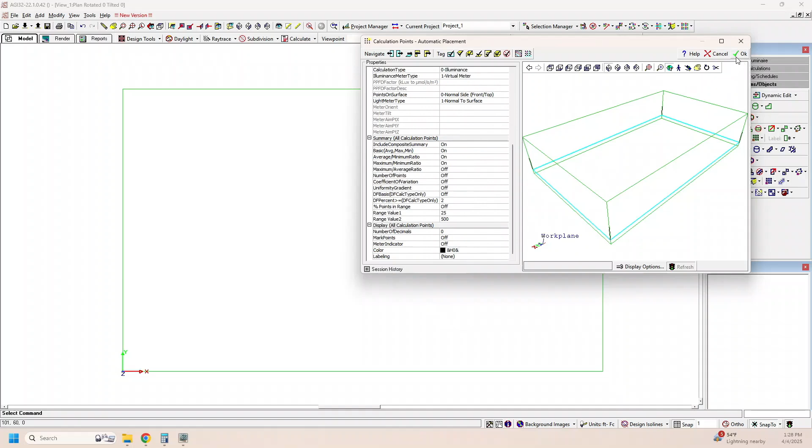So what we're going to do first is an indoor shop. Let's make it 20-foot high ceilings, 100 by 60, so a 6,000 square foot industrial shop or warehouse, something like that. It's going to be perfect for our Durabay linear spec fixtures or our Durabay F UFO high bays. So here's our 100 by 60 structure.

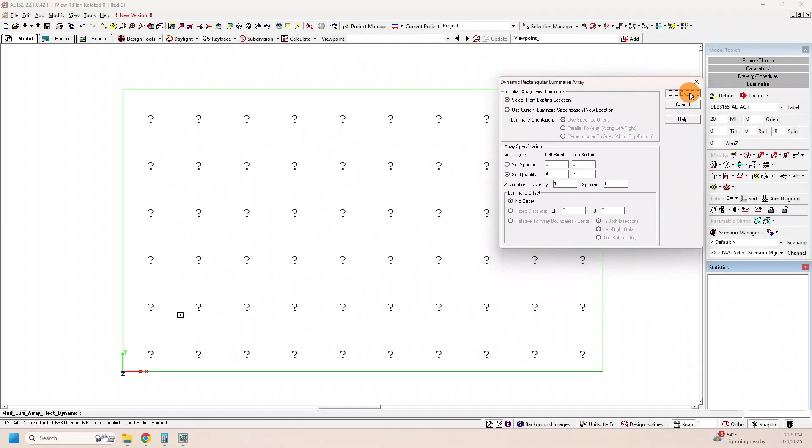First we're going to lay it out with DLBS 155s, which should be pretty good. In general, when I do these layouts, I just guess and check. I've been doing these a while, so I kind of know where to be on everything. We're going to lay out this project as a 4 by 3, equally space everything, 12 feet from each wall. I'm going to hit calculate here and see where we're at.

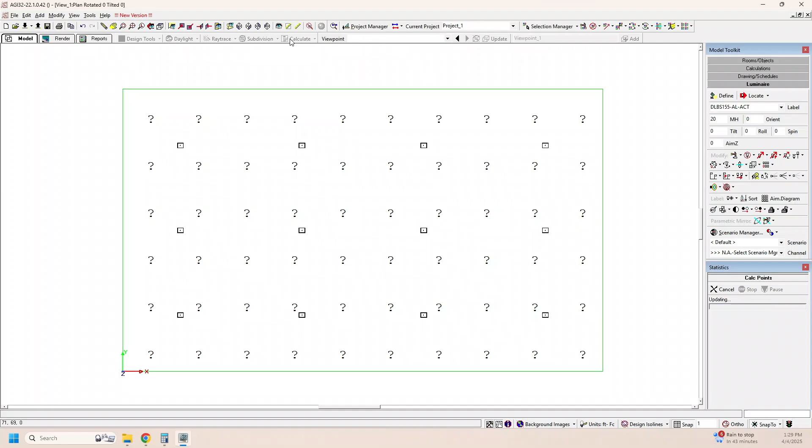Each of those question marks will turn into a foot candle reading at the floor, typically about 2.5 feet off the floor, which is kind of industry standard. When you're looking at these, I'll take a screenshot and put it in a PDF report. These are all foot candle readings, spaced 10 feet apart. I usually just try to make something that reads well. Each of these fixtures is mounted at 20 feet.

And we're looking over here at the data. Your average foot candle here is 48.2. That's pretty good for any sort of mechanic shop, workshop, or warehouse, anything like that. We're in good shape.

I do not love these two numbers, the average min ratio and the max min ratio. Those tell me the consistency of the light. I like average mins to be in the low ones, 1.2, 1.3. Max mins I try to get under 2, and that basically shows how consistent the highs are from the lows, and the averages from the lows.

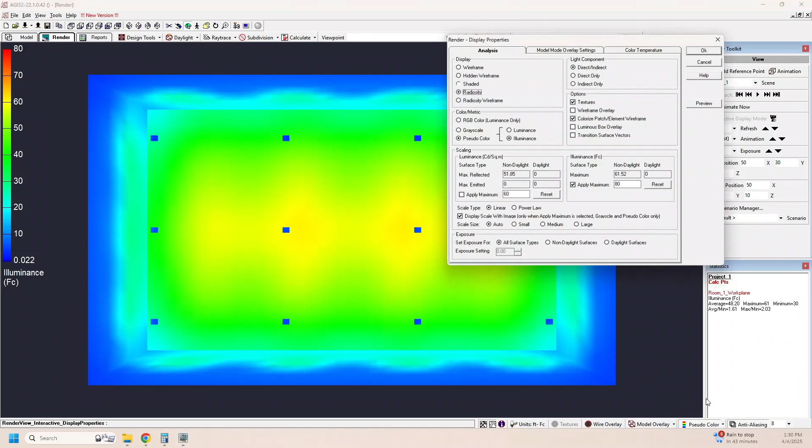I can look at this other mode and run this pseudo color, and what that essentially does is reference each area of the floor on this chart, so we can see it a bit more dynamically. Instead of comparing numbers, we can compare it to this rainbow over here. The reds are brighter than the greens, and as you can see it's kind of light blue up here where it's pretty dim. The orange and red is concentrated in the middle, so it's really bright there, and a little dim on the outside.

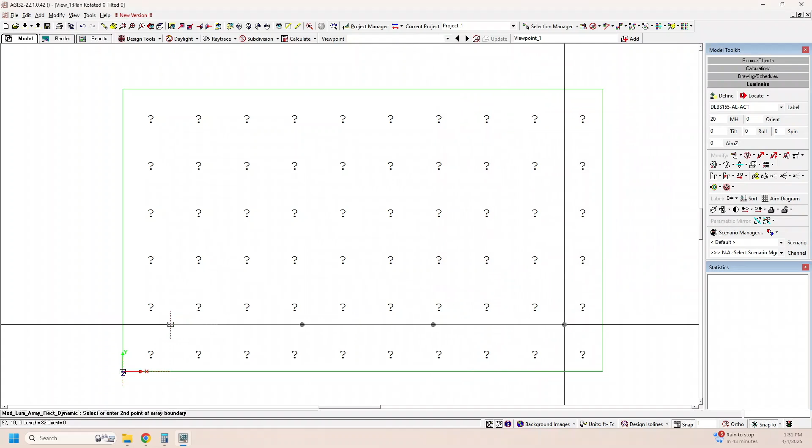So I'm going to go to work on this thing for just a little bit. We started here at 12-12. I'm going to start over and move the fixtures closer to each wall by 2 feet, so we'll go to 10-10, and we'll still use 12 fixtures, equally spaced. And I'm going to recalculate.

If you remember, our average was 48.2, our average min was like 1.6, and our max min was over 2. Now if you'll look, our average dropped just a little bit but it's still in the same range, 46.5, it was 48. But the average min and the max mins have each plummeted and gotten closer and closer to 1. Again, in the first layout this was like 1.6, and this was over 2.

And what those numbers are our reading is just the light consistency. So again, let's go back over to the render page so we can look at it in color. This is the exact same scale, but there's no red anymore. Now it's just yellow, and the entire area, including the corners, are a brighter green. That means the lows are now higher and the highs are now lower, so it's more consistent. It's a better finished product.

So I'm pretty happy with that. What I would do is take two screenshots, one showing the numbers and one showing that color mode, put them on the same sheet of paper, and explicitly write out the average, the max, the min, and the two ratios we're looking at. Then I'll send it in a PDF and say, I'd go with this.

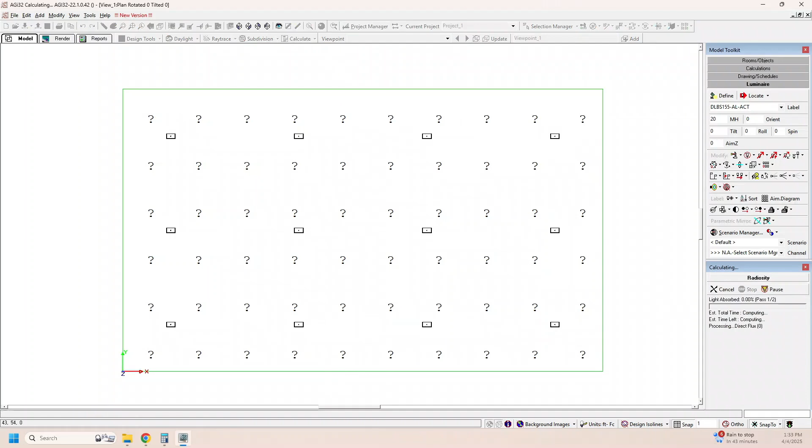all and make all these fixtures DLBS 310s instead of 155s. Now this is way overkill for this application. 110-foot candles is way too bright. It's like a tanning salon in there. But again, it gives the same kind of ratios.

The max mins and the average mins are still really, really good. So this light is ultra consistent. It's just way too bright for the application, right? Everything is dark red on the 80-foot candle scale. So we could look here, reset that chart, and you can see the spread of this actual project is really, really good. It's just way too bright for the application.

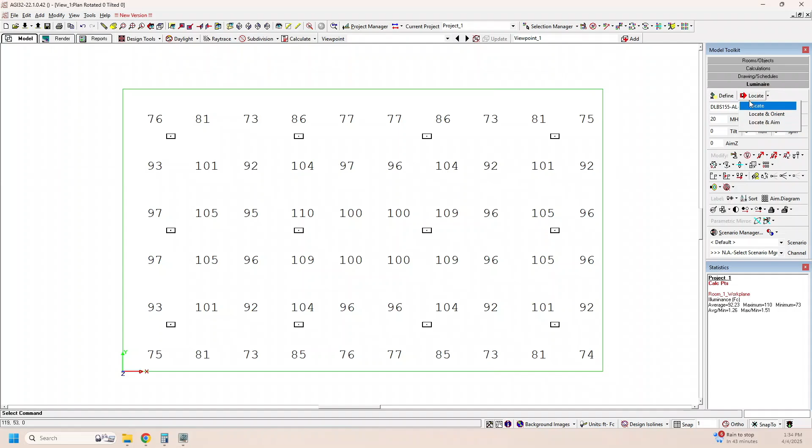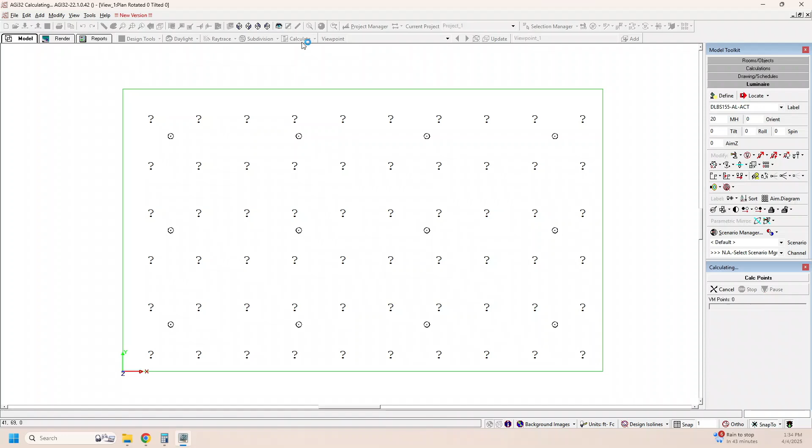So, you know, if I wanted to, we could switch from the linear fixtures, and let's take a third look and use the round 240-watt high bays. And we should get a pretty good result with these as well.

Okay, so we're at 65 average foot candles, great average min and max min ratios. I'd be really happy with this project too. If the customer's looking for it to be really bright, let me reset this.

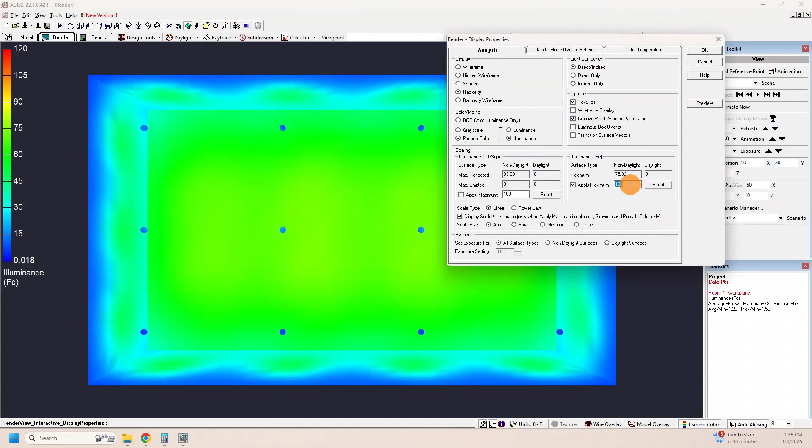I'm going to reset it to 70 so you can compare it. The DBLS 155s, it was mostly yellow and orange. Well, this is mostly red. This is a little brighter, but we're using a more powerful fixture, so that's to be expected.

But if I pumped it up, you can see a great spread, really consistent. Customer would be really pleased with that, and that's super bright in there. So,

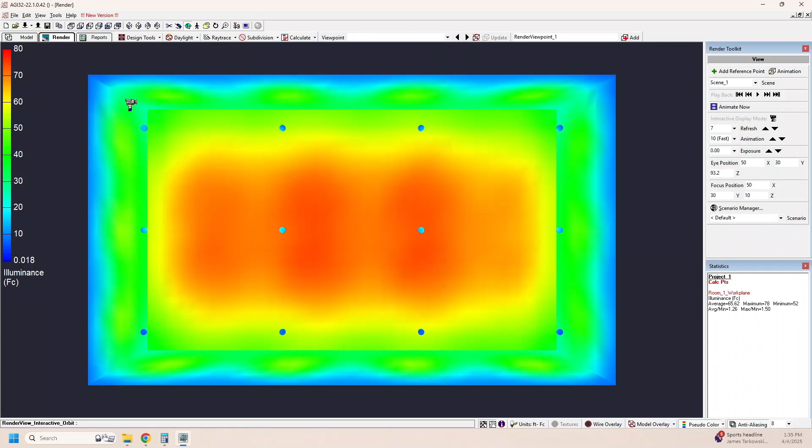Again, I am not classically trained in AGI 32, but I know enough to make me dangerous. And essentially what I would do is take screenshots of all those, record all those numbers, and then put it together in a multi-page PDF, just like so.

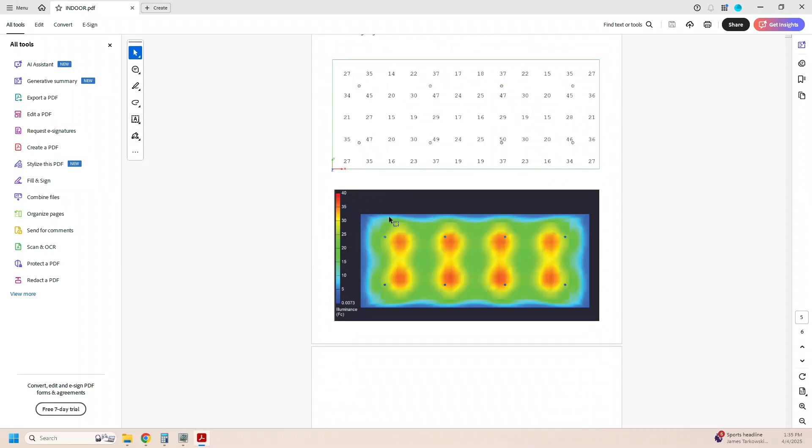This is a project I did a couple months ago for a customer, kind of a similar area. It's, what is this, 120 by 50 at 15 feet. As you can see, they wanted to use 310s. 310s were way too powerful for a 15-foot mounting height.

So I did what they asked me to do, so I could show them that that was not the right fixture for the application, and then dialed it down to 155s. You can see better consistency here.

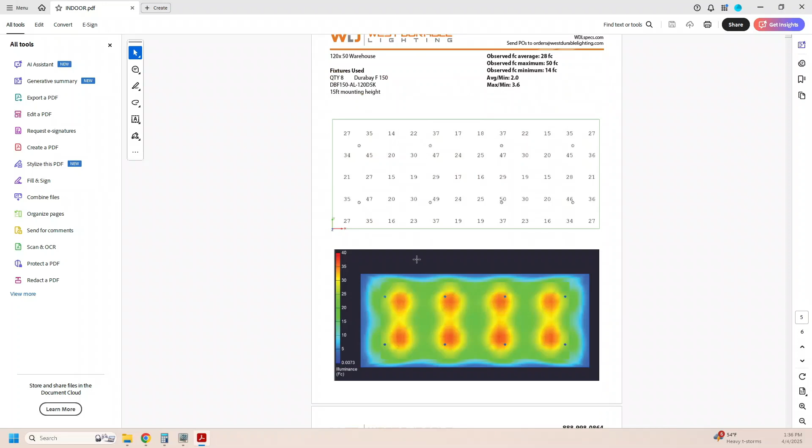Here's a couple more 155s, a little brighter. Then looks like we did 3 rows of fixtures here, and that made it really, really bright, just to show some options. I will definitely call and follow up with the salesperson or whoever's requesting the layout so we can talk about these, because there's a lot of context that goes involved with all these layouts, not just numbers, to make sure you know what you're looking for.

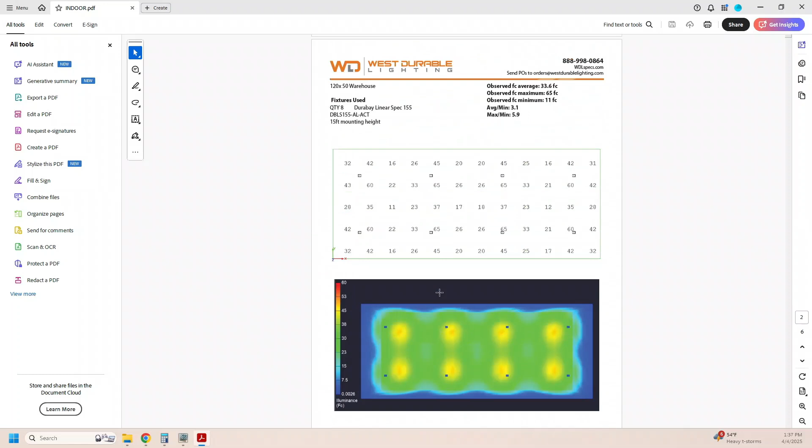So as you can see, to do an indoor facility with high bays, pretty easy. Took about 10 minutes. We did 3 different options of fixtures, and we're able to dial down to the best one and get you right in the ballpark. So basically for any indoor facility, I just need dimensions and a mounting height and kind of what you're looking for, and we'll be able to knock it out and get it back to you pretty quick.

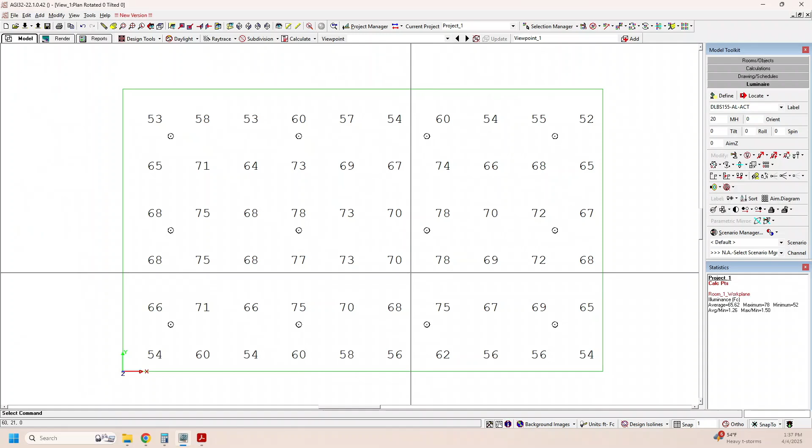Some other projects we've done. Let me get this pulled up.

So we can do layouts for outdoor lighting as well. They're much more involved. This is a new construction of a business park or something like that, and they gave me some schematics, something to go off of, and they said here's 4 lights. We need to know how bright it's going to be in this facility.

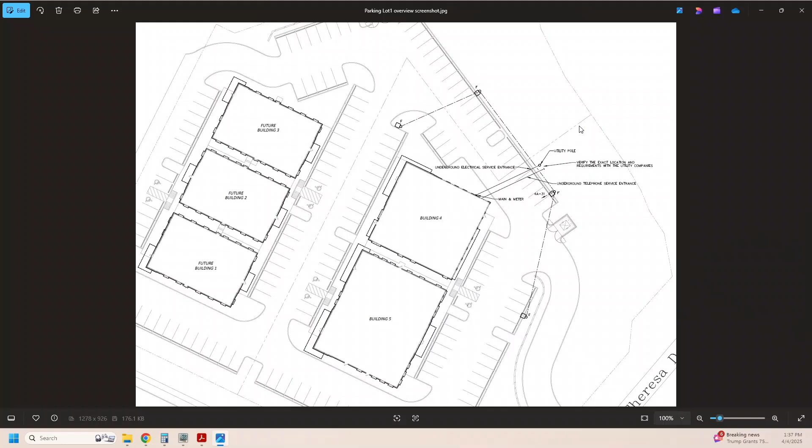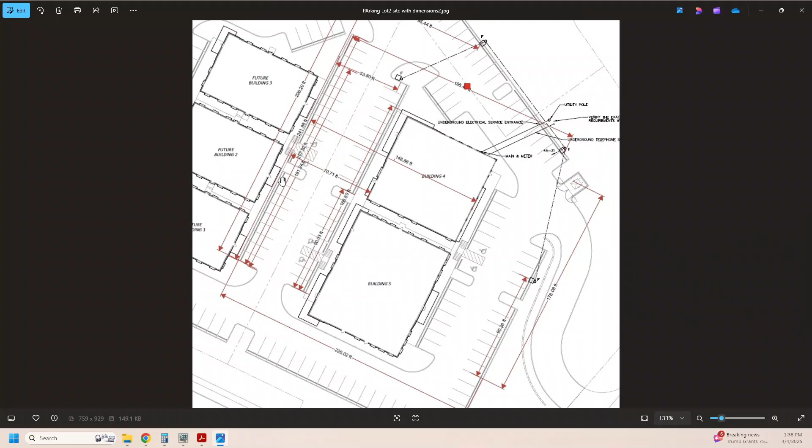So being able to send me that PDF of those drawings and those plans, I was able to pull dimensions, which is a little painstaking, but it's pretty easy to do. Basically, we just have to establish an origin, make all of our references and our distances for the buildings and the locations of the fixtures relative to one point. So that's what I'm doing here.

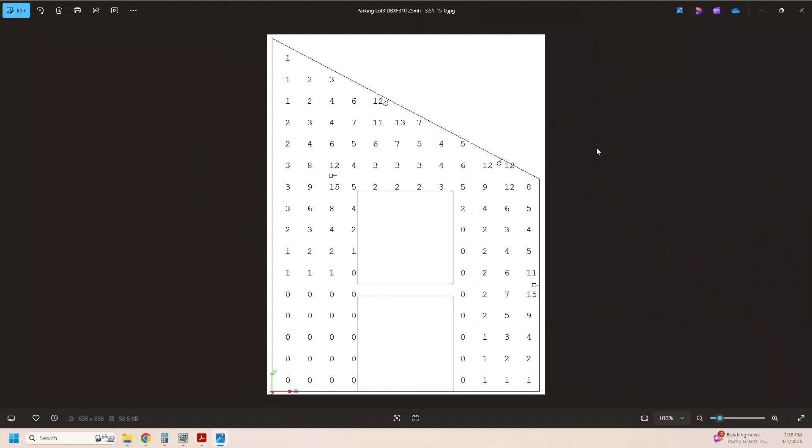And then in AGI 32, I made a drawing referencing all those numbers, hung some fixtures. I think these are 310 watt shoe boxes at 25 feet. And you can kind of see the foot candles there. And then what I will do is put them in Photoshop and overlay them. And again, you get the same kind of report.

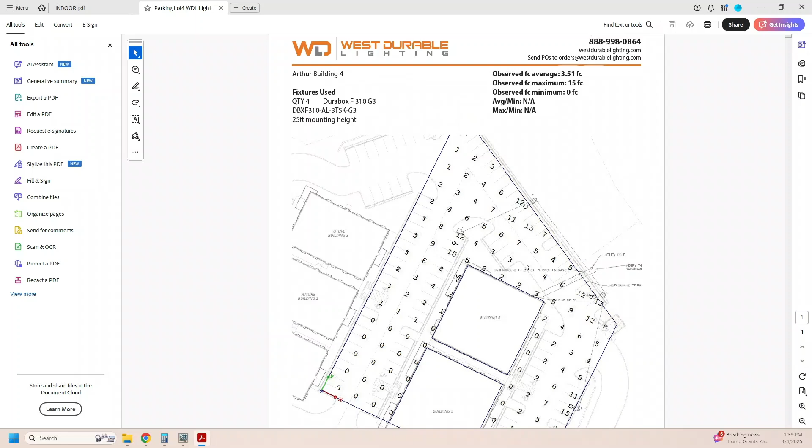Max and min averages I don't really do. It's a little bit dependent on the application, but there's so many zeros here, it's going to mess with all the mathematical calculations of this particular application. As you can see, my measurements and my drawing was pretty good. It's not perfect. Here's where the actual plan said to put the light, and I put it here. So it's not perfect, but it gets the point across as to what the customer can expect in this job. So we can do that.

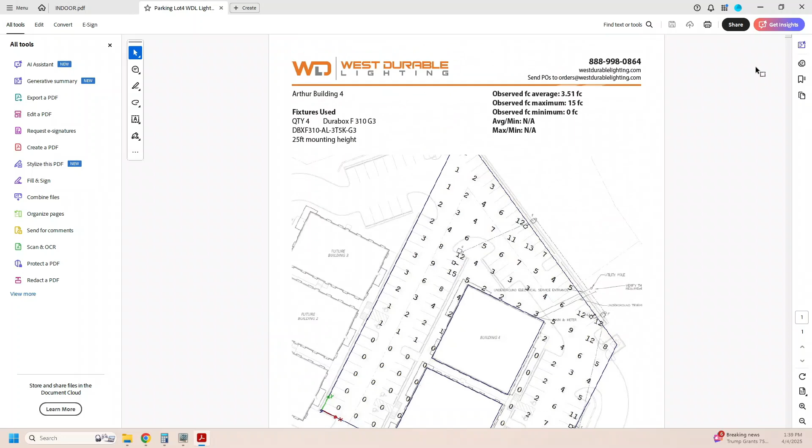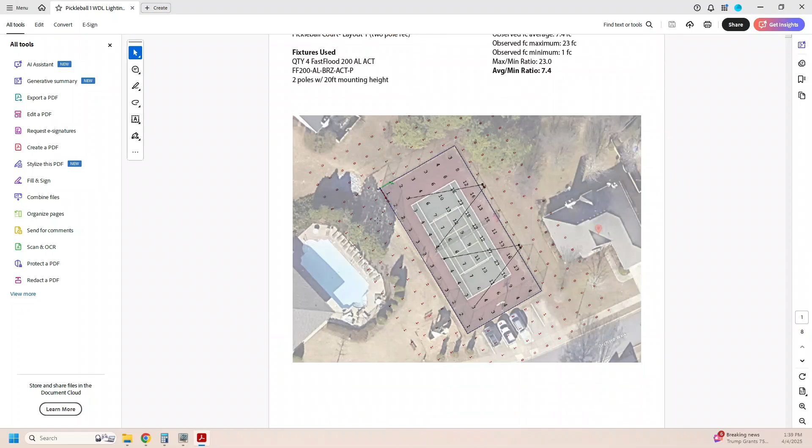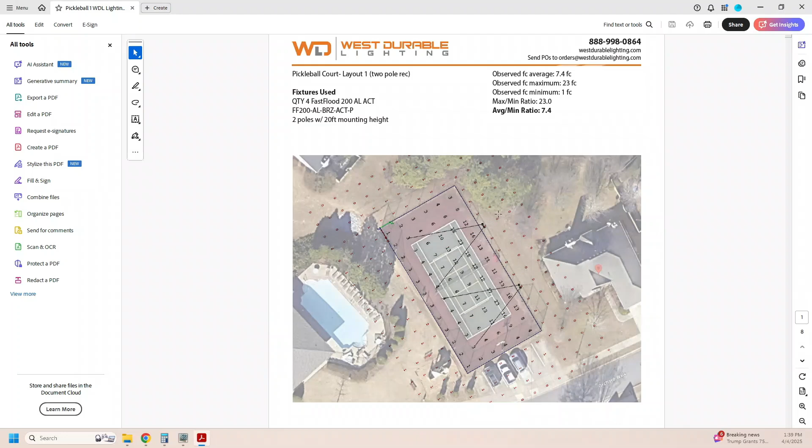Here's another project we did. This is a pickleball facility for a senior center. And the nice part about it is this is an established location, so the customer just sent me the address. I looked it up on Google Maps and was able to pull dimensions. In this project, they were really concerned about light spillage and light pollution. So they were interested in only putting up 2 light poles on this side of the facility so they wouldn't spray into this house. But when you look at the actual tennis court, you're only lighting up half of it. So that was no good.

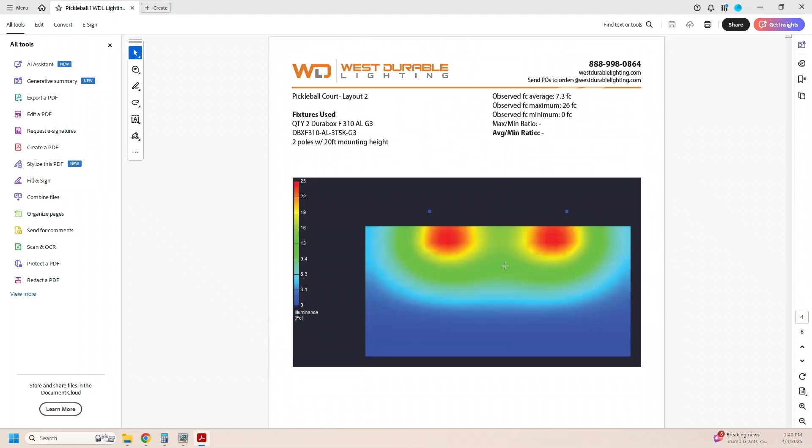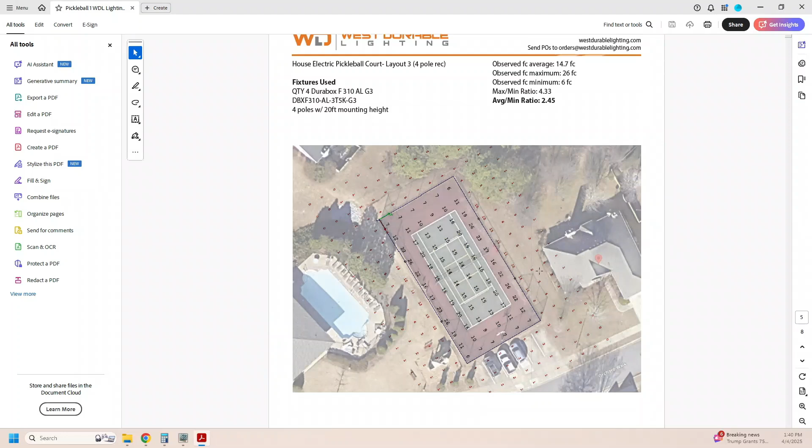So then we went and used some shoe boxes, thinking maybe they'd disperse the light a little bit better, but that didn't work. So basically we had to resort to saying, look, there's no use doing this unless you're going to use 4 poles, mount them here, and show what the light spillage was. And as you can see, it's a much better light application, something everybody will be proud of.

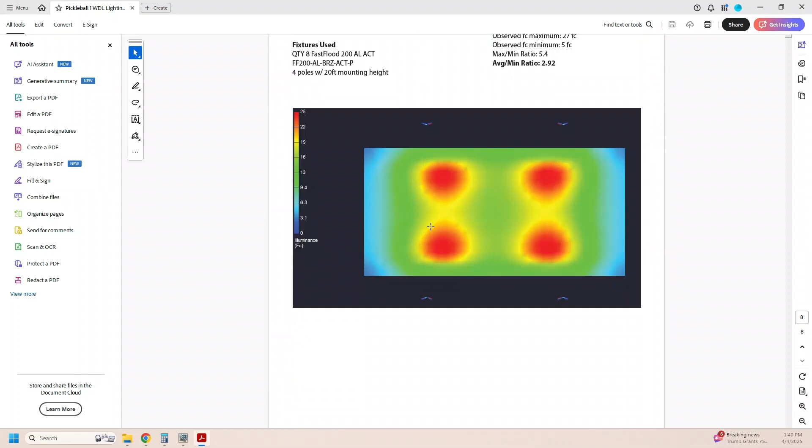We gave them a couple options, floodlights, shoe boxes, and let the customer make the best decision and the best pitch to try to sell this job. It's kind of a large undertaking, it's a lot of work, a lot of time to go through and get all this for the potential of maybe selling 8 lights and 4 poles. But it's all about the relationship and establishing a good connection with our customers and trying to help everybody sell jobs. That's the point of this. So that's kind of how outdoor stuff looks.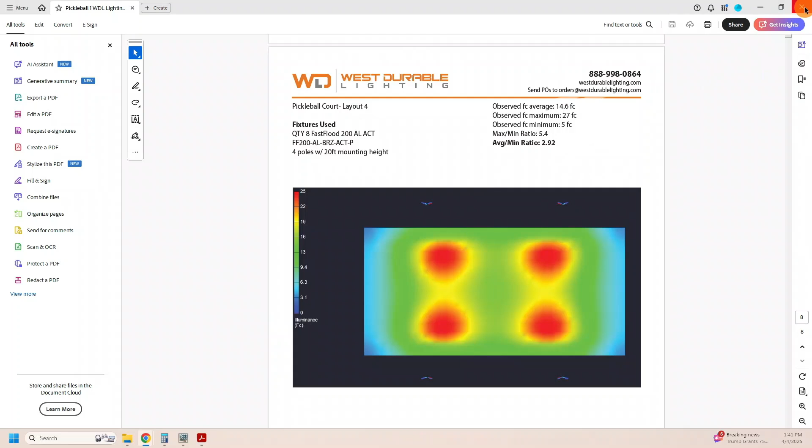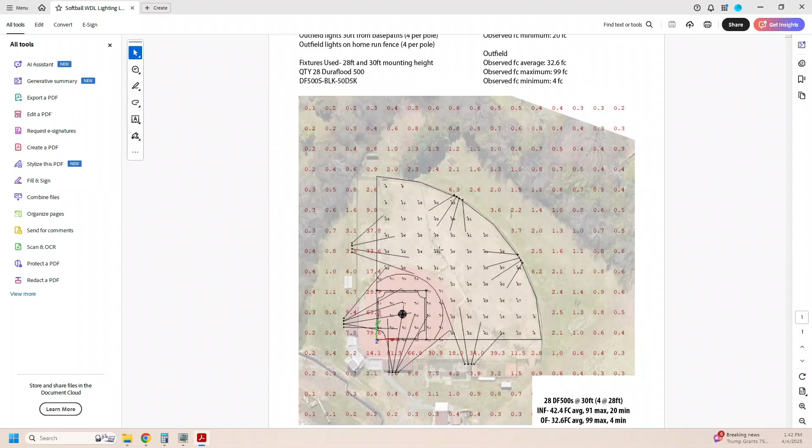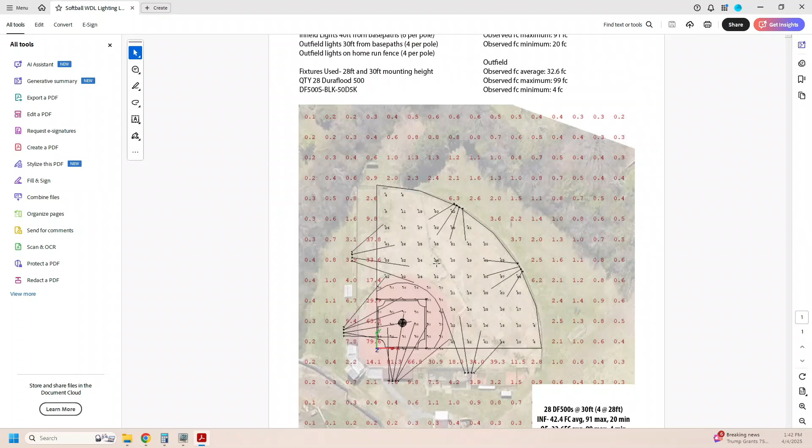Obviously these types of applications, these types of projects take more time, they take more energy, and we need more information up front. But we can certainly do this and help put everybody in the right direction as to where they need to go. So we're happy to do these.